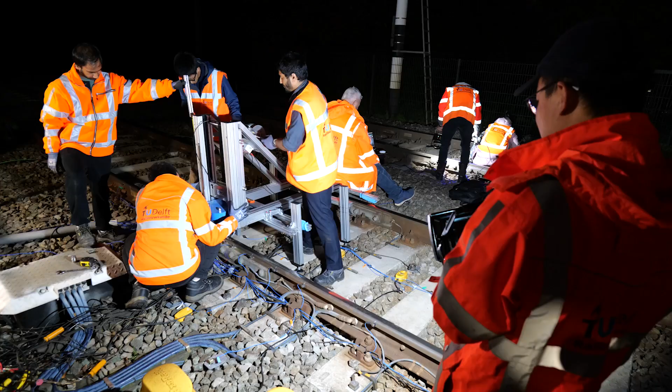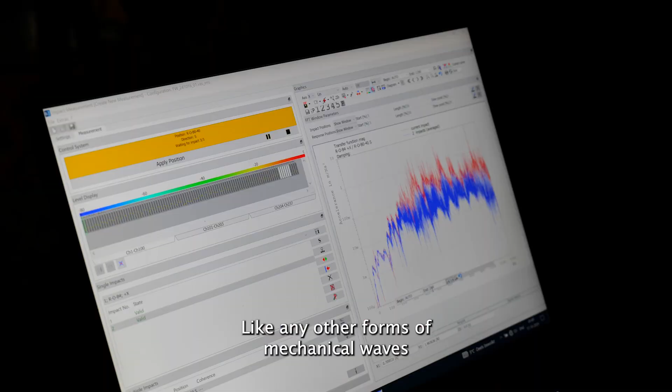So one of the key questions we're trying to address is what causes these vibrations. So when you think of vibrations, you think of mechanical waves. Like any other forms of mechanical waves, it must have a source or origin, and then it must have a propagation path or transmission medium.

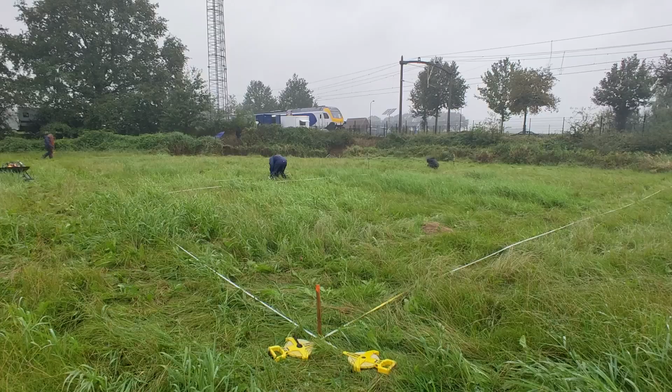In general, we have three kinds of tests. One is what we call pass-by measurements. So we measure the vibrations generated by the train passages. The second type of measurement is the in-track measurement. And the third type of measurement is the seismic measurement, which occurs within the field. That was carried out by our colleagues from the geoscience department.

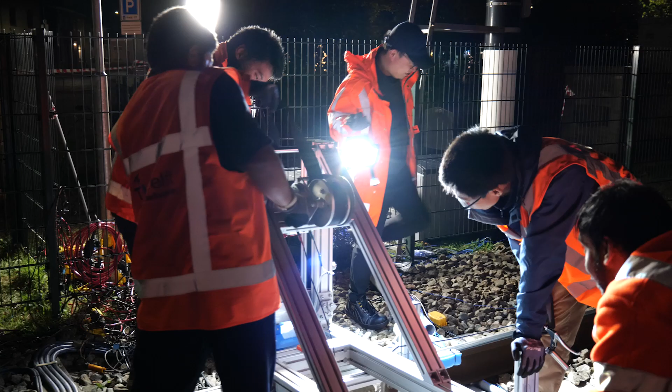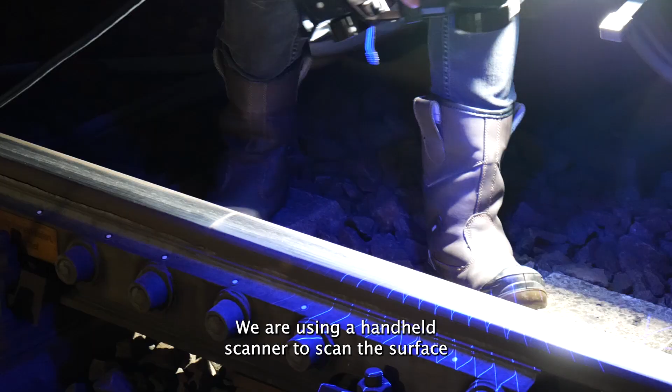What we're doing here in Oisterwijk are actually three types of tests or measurements. The first measurement is this 3D scan. So we're using a handheld scanner to scan the surface of this insulated joint to get an idea of the geometry, because this is a very important feature or characteristic of this insulated joint.

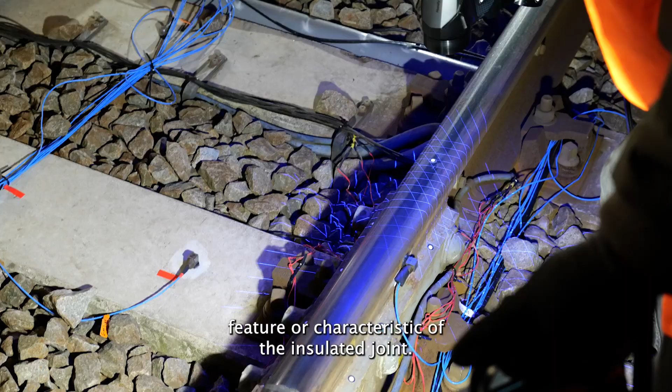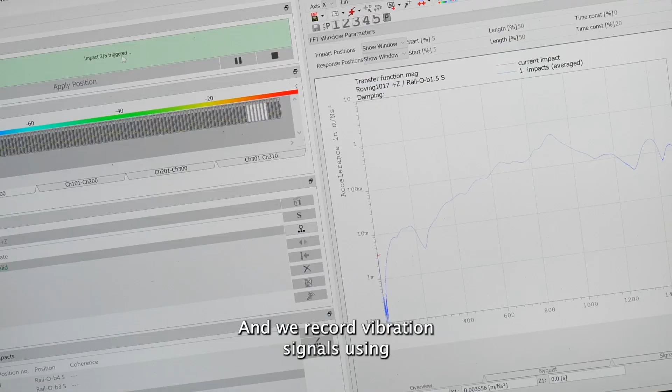Another type of test is the so-called hammer test. So we're using a big hammer over there to give excitation to the track, and we record vibration signals using the accelerometers on the rail, on the sleepers, in the ballast, and also in the field.

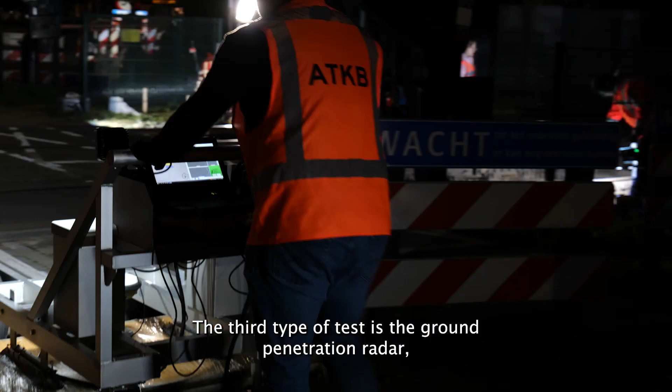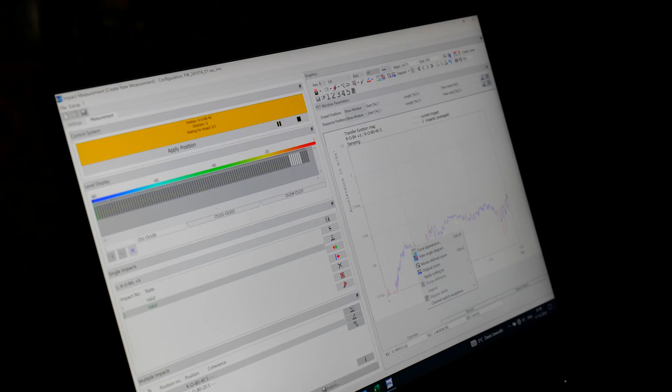The third type of test is the ground penetrating radar. So we measure the underlayers of the track structure using this GPR, ground penetrating radar, to get an impression of the characteristics of what is underneath the track structure. With these measurement tests, we could validate or provide input to the models that we're going to build for this project.

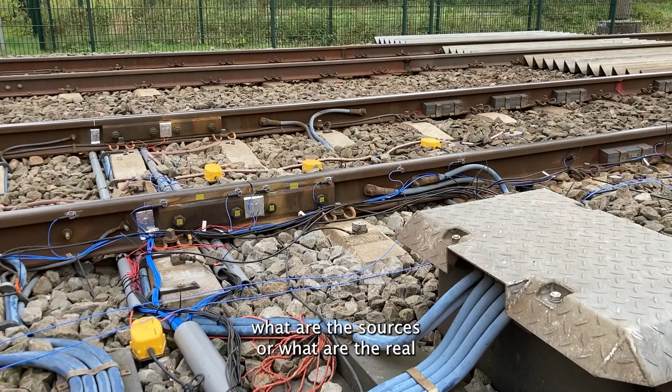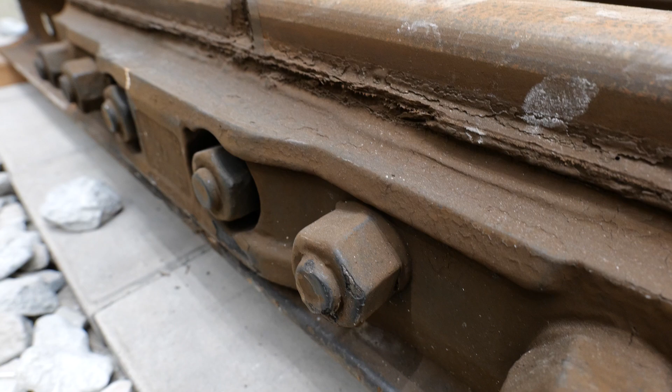Through the measurement data, we want to investigate what are the sources or the real reasons for the vibration problems. Is it because of the bad geometry of the joint? Is it because of unsupported sleepers? Or is it because there's something in the transmission path of the vibrations? And another insight we want to get is, are our models accurate enough or effective enough to predict these vibrations? If not, what are the areas to improve within these models?

So ABA is short for axle box acceleration. It's a technique that we use to monitor the condition of the railway track. In this technique, we install accelerometers on the axle box of the railway vehicle. So when the railway vehicles are traveling along the railway network, we use the vibrations collected by the vehicle as an indicator for the condition of the railway track.

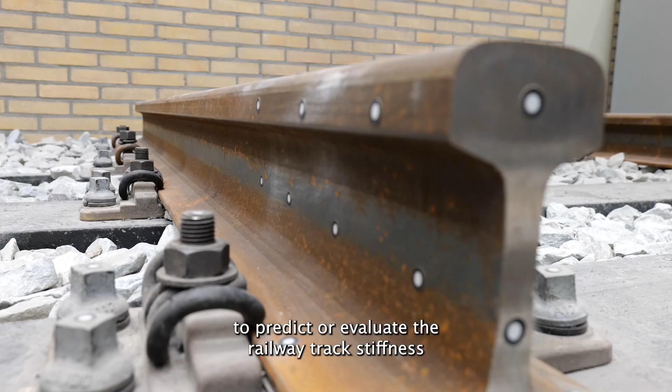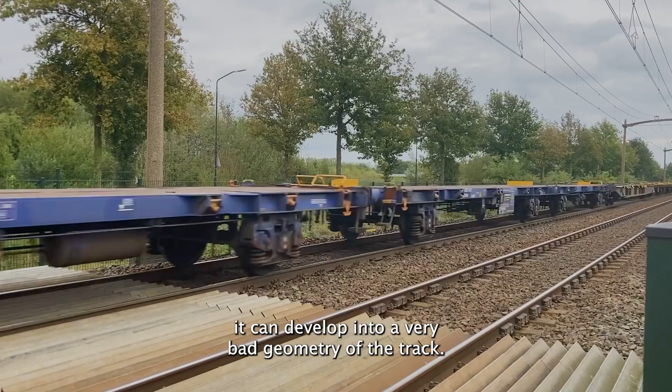I developed methods to predict or evaluate the track stiffness. Track stiffness is associated with a lot of problems within the track. One of the problems is the geometry. When you have a variation of stiffness, in the future it can develop into a very bad geometry of the track. So it's useful to really measure the stiffness and be able to predict the development of the stiffness in the long term.

The idea is to constantly iterate even after the STEM program is finished. In the future, if you have a new problem to solve and you find new insights, you could always incorporate it into the STEM tool. So we hope it to be a continuously renewing and ever-growing tool that can be used in the future, not only by the Dutch railways, but also by railway companies around the world.